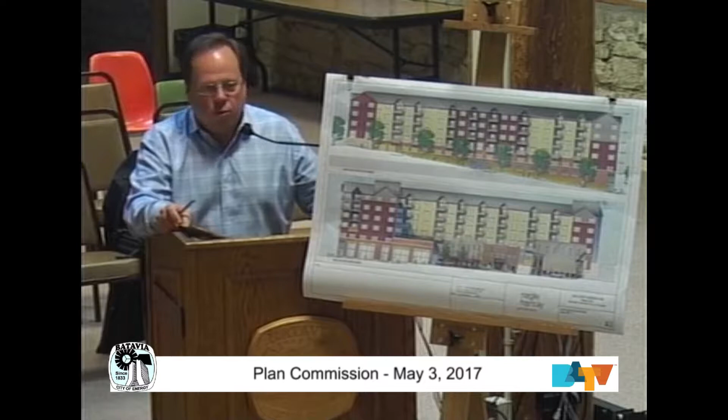Some of the items he'll be able to refer to on the boards in front of you, or the plan on the wall, or the sample panels. We're trying to cover all the items we changed, but some of it will be almost rapid fire, just a narrative of what we did on the plan. Again, if you have a question, please interrupt us. So with that, I'll turn it over to Don McKay to walk through those changes.

Good evening, for the record my name is Don McKay. I'm a principal at Nagle Hartray Architecture, located in Chicago. I live in Oak Park, Illinois. The drawings Dave referred to are a packet of about 15 to 20 drawings submitted responding to requests we had from the Plan Commission for additional information.

So I'm going to go through the comments as Dave indicated, running through them in groups of drawings. I'll start with the floor plans, then talk about the architectural site plan, the exterior elevations, and finally the landscape plan.

Beginning with the floor plans, the retail storefronts have been added and are now indicated on the floor plans. Excuse me, can they be put on the screen? Sure, so while you're talking about it, hopefully we can follow along.

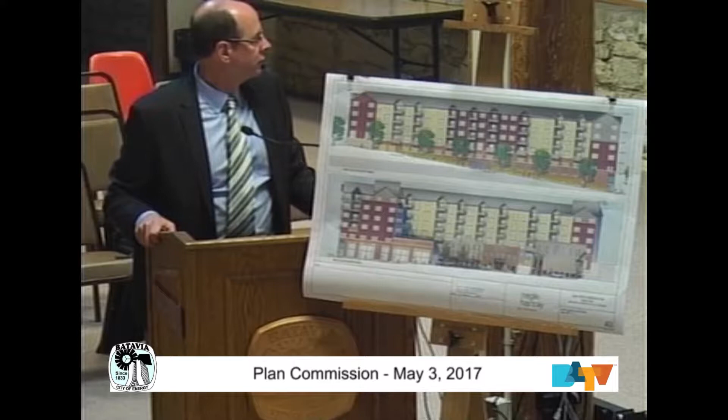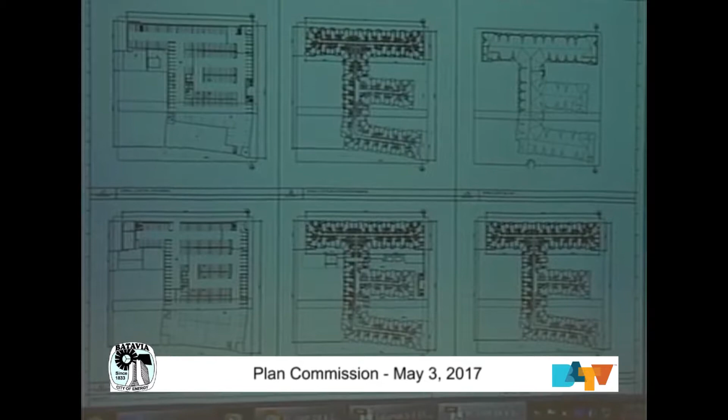The plans on the screen right now are at a very small scale, so it's probably going to be hard to follow what I'm talking about. The plans that follow are at a larger scale showing a lot more detail, and it would take quite some time to go through and pick up everything. So I'm happy to do that, but maybe the better thing is to go through the list of things we have, and if there are certain things you have questions or concerns about, we can focus on those.

We were asked to add the retail storefronts on the floor plans, which we've done, primarily along the Wilson Street elevation and the River Street elevation. On the lower garage plan, we updated the northwest corner to correspond to the angled corner shown above it. On the upper garage floor plan, exterior doors at the northeast and southeast exit stairs have been added to correspond to the elevations. The exterior door at the southeast exit stair was removed from the lower garage floor plan to coordinate with the grades on the site. This door has been moved elsewhere on the upper garage floor plan, as I indicated. The exterior windows and clear openings have been added to the garage floor plans to coordinate with the elevations.

All the openings shown at the garage on the elevations are now also shown on the garage floor plans. The two-bedroom units at residential entries have been updated to indicate projecting bedrooms above covered doors on the first floor. The one and two-bedroom units at the south side of the north-south bar have been relocated to coordinate balcony placement with the bend in the building face. Some of these were issues where the floor plan showed one thing and the elevation showed another, so we've cleaned that up to make sure they correspond now. A roof plan, which had been missing from previous submittals, has been included in the submittal you have right now. That's a quick summary of the floor plans.

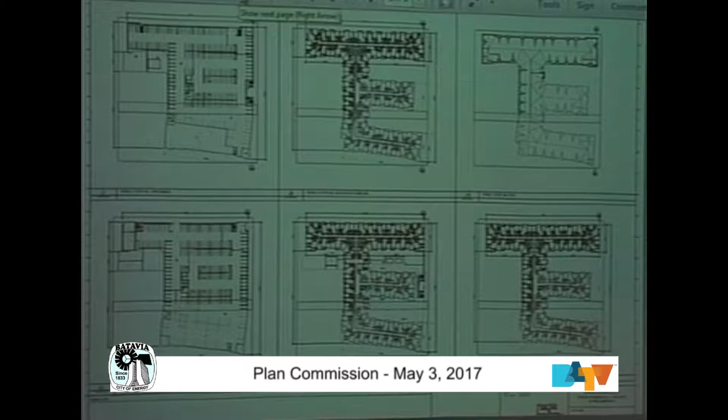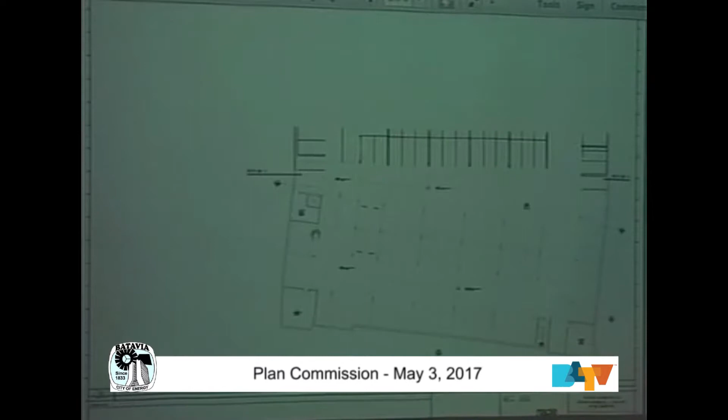I hadn't noticed the stair you were talking about, the door that exited - southwest side, is that on Wilson? Southeast, northeast, on the upper garage floor plan. Those are both shown. I thought you said one was eliminated because it didn't work with grade. Yes, there was a door at the southeast exit stair on the lower garage plan that was removed. So it's coming out the upper floor - that's correct, it was just shown on the wrong floor plan. And that ties into the tower, so that's the exit for residents also? It is, yes, it's an exit stair that goes all the way up through the building.

Any other questions on the floor plans?

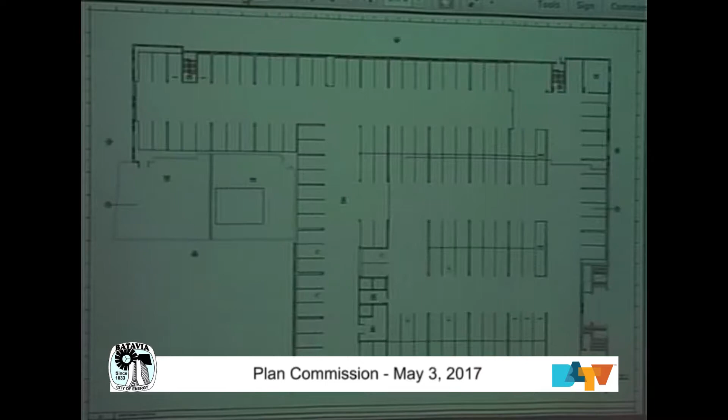Great, thank you. On the architectural site plan - distinguishing that from the landscape plan - on the architectural site plan, which is the first drawing, G001. Additional landscape information is shown on the landscape plans, I'll get to those in a minute. But on the architectural site plan, the building footprint has been updated so it corresponds now to all of the unit plans shown on the floor plans above.

We have a couple of hinge pieces in the building. It's very subtle, you can kind of see it on the plans there. So there are a couple places in the plan where the building jogs a little bit, shown two places right here. That's a clarification to the plans that wasn't reflected before - it's a subtlety that was a function of working out the interior unit plans and the coordination between the balconies and the unit plans on that side of the building.

The difference is the two streets, Wilson and River, are not parallel. That's correct, yeah. There's barely anything in this building that's parallel with anything else.

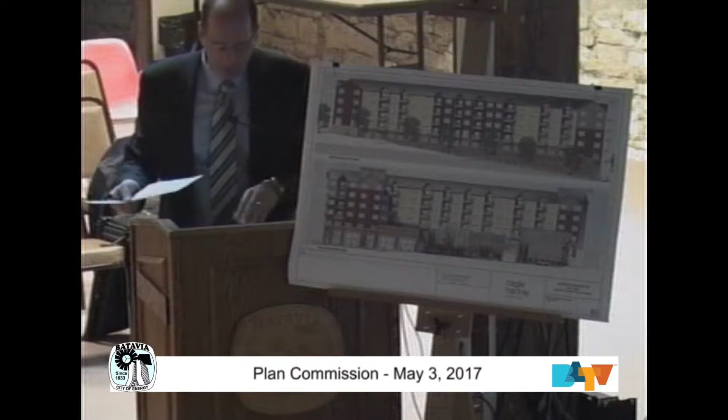And they're well back from the property line? They are, yes, I see it's recessed there - I apologize, I forgot my magnifying glass. It's hard to read these dimensions, they're small. To the southwest corner from the property line looks like maybe 6 feet. My eyes aren't that good either. 6'3", I'd say. I can read the dimension next to it, which is 12'7". It looks like it's roughly half that dimension.

On this site plan, we've also indicated with arrows where the entry points are into the retail space. Here's one bit of coordination that wasn't picked up - these two first arrows here, we don't actually have doors into the retail space there. Our first door into the retail space along Wilson is located right here, and then we have four others along this facade - that's a stair door there. We have two more retail doors located mid-block as well. That should correspond to the elevation drawings we have.

The reason we don't have retail doors further west along this facade is because of the way grade slopes off relative to the floor plane inside the building. It would require steps, which would make for inaccessible entries into those spaces. Although it's possible to put one in as long as you have an accessible entry - could be a secondary access, if needed.

We've looked at some other ways of raising a portion of the sidewalk outside here in order to get entries that align with the floor elevation and are accessible. Imagine this is the high point of the site over here. If you were to get on a walk that was level down to here, but when you got down to here, there was a drop-off in grade next to the public sidewalk. The trick is, if it's high enough, we've got to put a guardrail on it.

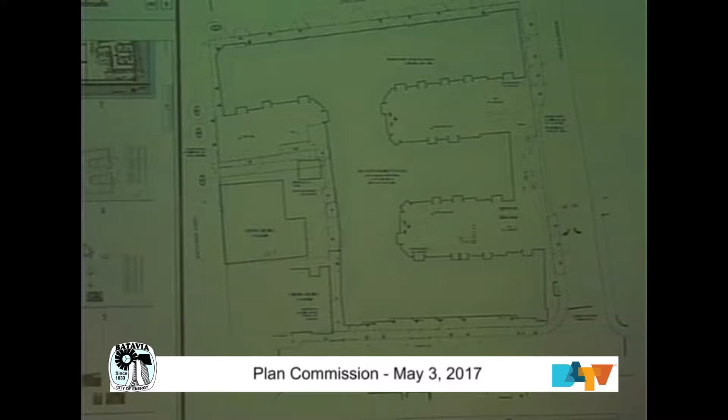And there's no landscaping proposed along there? The landscaping is shown on the landscape drawing. There's some, yeah, well there is on the east end. Yeah, there's trees and existing trees right now. Yeah.

So this drawing actually gives you a pretty good idea of where the property line is, probably a little bit clearer, easier to understand. Here's our property line. Oh okay. So what we were talking about earlier, here's a planting bed between the building and the property line here. This is really the public sidewalk area out here.

So what we were talking about earlier is that if we wanted to extend this sidewalk at a level elevation down towards the west end of the building, we could get a little wall there that allows you to get a flat walk up here and get more doors into the retail up here. Our concern is that that little wall with a guardrail on top of it especially starts to act as kind of a barrier between the public area and the retail space there.

Again, you could do that and have a stair on the west end of that. That's exactly what we looked at. Able-bodied people could use the stair, but if you had someone who needed accessibility, they could use the ramp. That's right, that's right. So as far as meeting the accessibility requirements, it can easily be done. I think this is more a judgment about what's best for the life of the retail space there, what's going to make it most desirable.

So Don, if I may, the elevations for the southern face, based on the revisions to the drawing, the door that's over the one that says boutique and cafe, those actually wouldn't be doors based on that right now, at least. Let me check the elevation. Is there a drawing you can refer to there? A2, the elevation drawings. Okay, so you're looking at the rendering.

Yes, so you're talking about this elevation here. So this door and this door will not be there, at least for now.

One of the things we're in the process of coordinating with our civil engineer is this slope along here. What's shown on this elevation right now kind of maximizes our ability to get the doors to the retail to align with our sidewalk. Unfortunately, this doesn't work very well with the existing curb elevation that's out there. The street elevation, you can see how it slopes up, gets flatter, you get a flat area, then it slopes up again. In fact, the street elevation is more or less a constant slope from one corner to the other.

If we do something like this, we're going to get more than a 2% cross slope between the curb and the face of the building, which is not going to work for accessibility. So that's why we're working this out with the civil engineer. We want to leave the existing curb where it is, we don't want to mess with that. And we also want to make sure we have a positive slope from the building towards the gutter, but it can't be more than 2%, otherwise it doesn't work for accessibility requirements.

So by the time we factor all that in, that's why we end up losing these two doors shown here right now. The only way we could keep them would be to drop the retail floor down quite a bit more than what's shown here. One of the results of that, we're balancing this against the bedrock elevations we have underneath, and trying to push the building further down into the bedrock becomes a challenge as well. So that accounts for the elimination of these two doors.

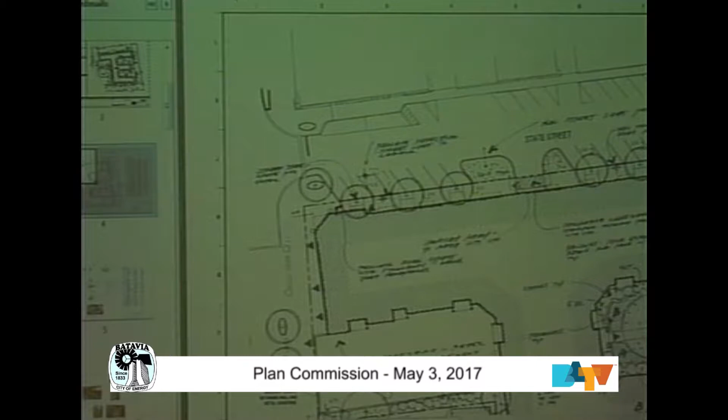So there are two landscape architects working on this. One is a landscape architect retained by the city to work on the piece between Wilson Street out here and the garage door back here that gets you into the accessible entry. The other landscape architect is responsible for everything else you see on the plan. So part of what we've done since the last submittal is coordinate between those two and make sure we've got a plan that reflects both designs.

The courtyard landscaping has been updated to incorporate the first floor residential patio. This was a question you can see in the plans right now. These little boxes shown here indicate where the first floor patios are in those courtyards. That's something that was not shown before.

Pedestrian lights have been updated at the plaza entry on Washington Street. There are a couple of lights shown out here, so there's one here, and the intention is that these lights cast light on the sidewalk, but also on the stair, focusing on the entry piece coming into the building here.

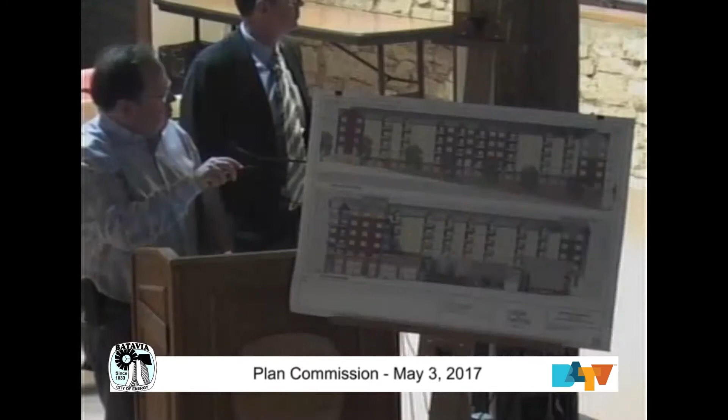Will that be an option for the residents? They're showing it if you zoom into that area. You can see the tables, and in the lower left corner there's a note about grills. Yes, fireplace with grills.

This is on River Street, by the pool deck. But again, as Don and Tom indicated, this is a private space for the residents only, but it is outdoor space.

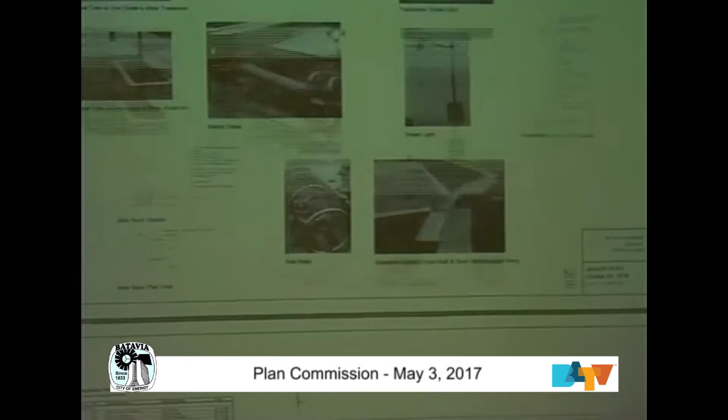Any other questions regarding the landscape plan? There was one other thing from the guidelines: if there were to be children expected to reside, tot lots and playgrounds should be provided. We didn't think about children, right? There are no tot lots.

Isn't that part of the zoning ordinance? What Commissioner Peterson is reading from are guidelines, not codified, not part of the zoning code. There are multiple family residential districts in the zoning code with specific open space requirements, but the downtown mixed use is not one of those districts, so there are no minimums required. I realize they're guidelines, I just know they were brought up at the committee of the whole, that we need to pay more attention to those.

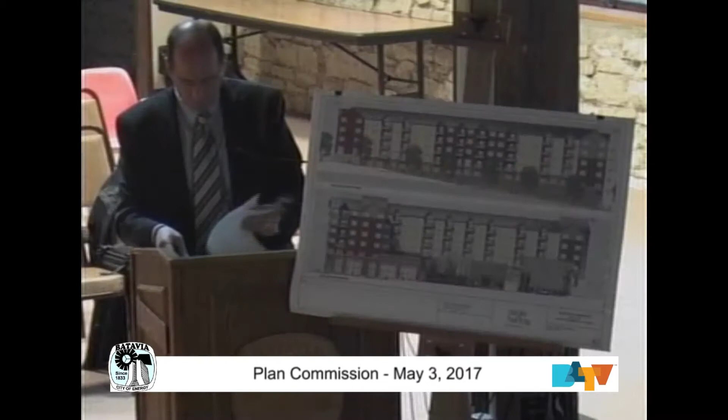You mentioned two landscape architects, and the city is working with Chris Lannert, yes. He's got some kind of meandering walk shown there, I'm trying to understand what that even is. I can address that since we hired the consultant.

Essentially, we have what's the existing call it alleyway, not legally an alley, but we'll call it that for description purposes. It goes behind, to the west of where the dentist office used to be and east of the yoga studio building, along the western edge of this building. Right now it's a driveway. We're proposing to remove the driveway and replace it with a pedestrian sidewalk and landscape area. Our landscape architect is designing a pathway that provides access to the garage from Wilson Street, but also provides access to the dumpster enclosure used by some property owners along River Street as a unified garbage access point.

So that's part of the design, a sidewalk essentially meandering on purpose, but then would also have some additional landscape areas. That has not been finalized yet, still a work in progress. From that perspective, it's really not part of the review tonight. Some of it depends on negotiations with the adjacent property owners, so that's something we're still working on. So yes, you could say that is excluded from this.

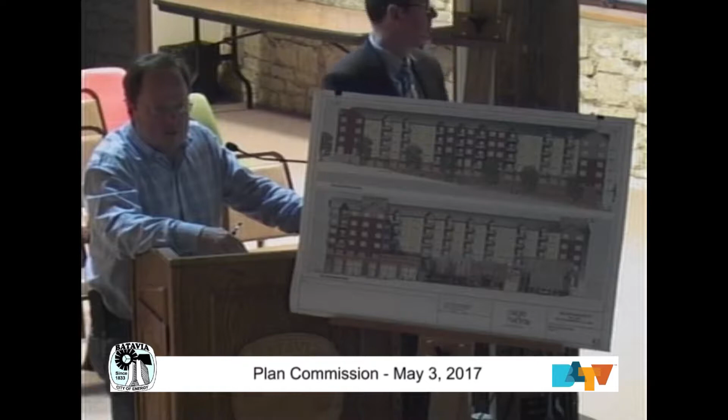I believe that circuitous path you're seeing is really a brick pattern on a larger brick patterned area. So don't interpret it as any type of fescue grass or plantings in between that path. Or too narrow a path. Exactly, I was a little concerned about that. And one of the challenges we have there is it's a relatively shady spot, so we have to carefully think about what kind of plantings we put in, since there isn't a lot of sun in there.

Going past that point, our plan shows it almost all green, which suggests it's all planted, intended to be grass. Is there no hardscape beyond that point, further back into the alleyway between the buildings? The only area where there may be some hardscape, and this hasn't been confirmed, is potentially a sidewalk from the garage entry and dumpster area to access O'Brien's backyard beer garden. But that hasn't been solidified with the O'Briens and their plans for the backyard space.

But it's something you're amenable to. Yes, yes. Well, until that's decided, it will remain as green space, green planted materials.

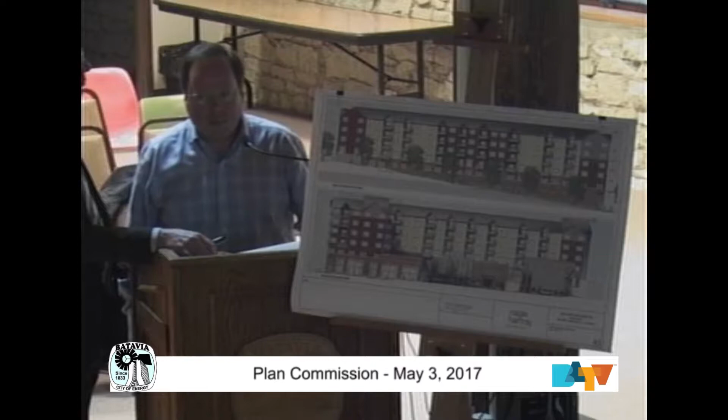And then further north, between their property and the south face of the pool deck area, you show green space there, but I know there's a pretty significant grade change along there. Is that pretty much at the same elevation as their current retaining wall? The retaining wall will be higher than grade, but if you think of their steps, somewhat steps, landing, steps, landing, steps, think of that as a uniform slope rather than steps on what would be the north side of their retaining wall.

Their retaining wall will remain. Everything north of that retaining wall will be planted. It's not intended to be a publicly accessible space. Right, but it's not like significantly a different elevation, like a pit between the walls. I envision the retaining wall will almost be the height of a handrail, so it'll stick above grade on both left and right sides as you go up that stairway. Does that make sense? Yeah.

Okay, and then in the courtyards you have some trellis work shown there? Portico. Yes. Can you guys describe in a little more detail what's going on there? It's intended to be a wood trellised structure—we're just checking if there was a detail provided—but it's not a roofed structure, it would be open, perhaps a shade area.

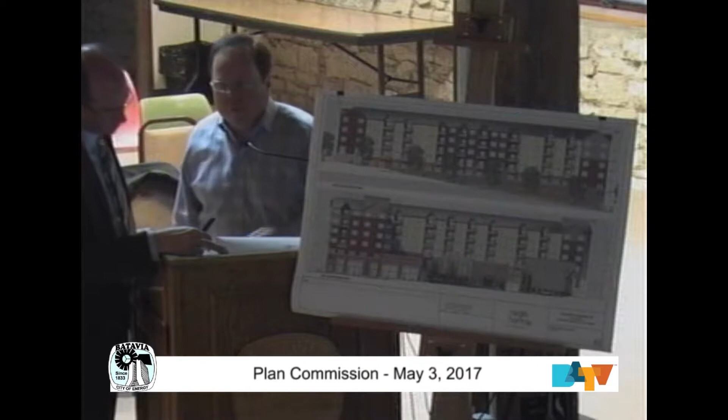I'm not the plant expert. Any other commissioners want to comment on the plant selection?

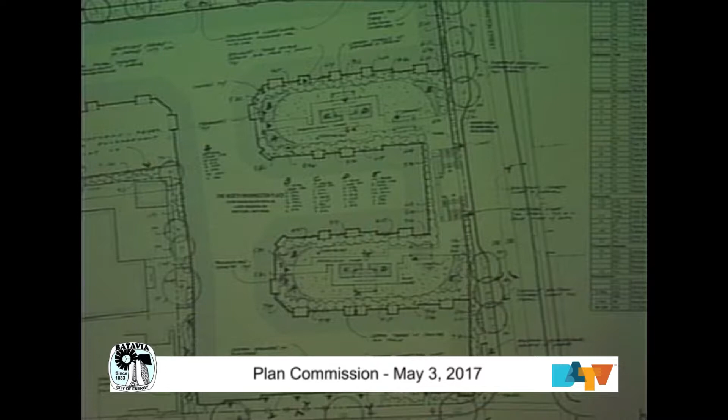The only problem I had was what I mentioned in that walkway. But if the city's landscapers are going to look into that, that will be our responsibility. That may extend further north, as Mr. Patzelt said, providing additional access, so some of that may be altered as we continue with negotiations. Will we get to see that plan? We can provide that to you, sure.

There are plantings shown along the Washington Avenue streetscape up against the wall, which is nice because it's going to soften that a little bit, especially where it meets the courtyard and you have that kind of 7-foot stone wall, won't be quite as harsh.

There was mention that this drop-off lane was extended at some point based on the fire department review. Is that still something that's going to happen, or is this now reflecting it? It was the easement, I think, that is currently under review by IDOT. IDOT has it in their hands. They have not responded back to that, the size of it, or whether it's even possible yet.

But if it happened, it would lengthen this, so we'd lose a little more potential streetscape planting. Possibly, and we have no control over that, because it's kind of governed by the length of the drop zone plus what the fire department wants for a fire lane also. So it's kind of a combined drop-off lane essentially, but ultimately IDOT controls that, so we're at the mercy of IDOT as to what they're gonna allow or not allow.

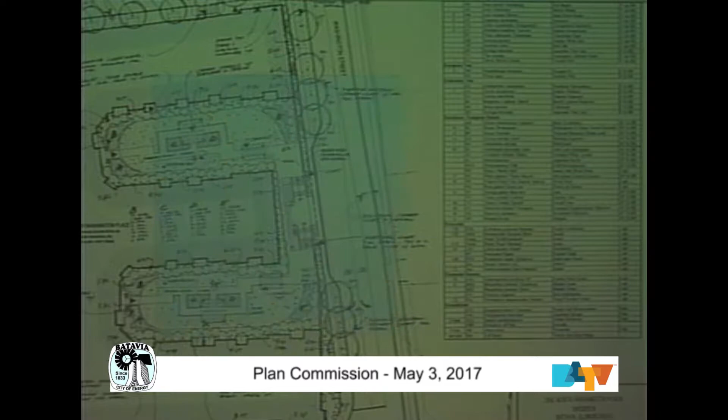And then you have 2 staircases and a ramp. I assume the ramp is required for ADA purposes? That's correct. It seems kind of a long ramp. Yeah, it's a long ways, and quite frankly you could go in the garage and take an elevator, but I guess maybe they can't access the lobby that way. The idea is to make the building universally accessible, so they can go in the front door just like everybody else can.

And then you do have another walk at the upper level that would connect the 2 courtyards. That's right, they can get around.

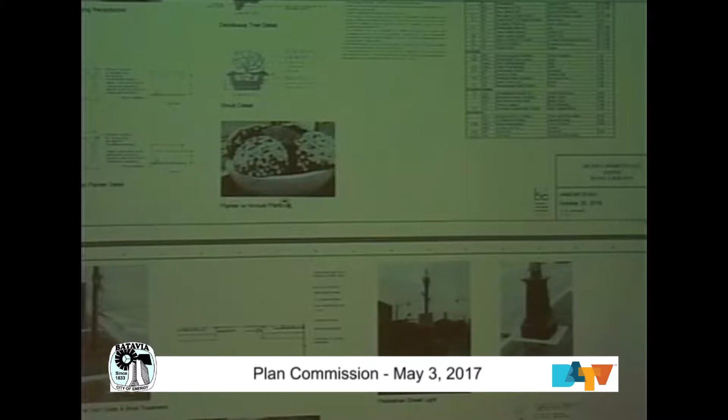And then all of the streetscape furnishings, do they parallel what we're using in the other areas of downtown? Yes. I know the lighting, we've got any number of different light fixtures downtown, but these are the historic fixtures that are in this area. And then the other furnishings match what we have there now? Yes, the specifications were taken from your streetscape plans for River Street, and photographs were taken of the actual furniture that's out there now.

I saw that you identified asphalt pavers at the garage, on the sidewalk at the garage door entrances. Is that what the city is using, asphalt pavers in sidewalks? The crossings, the pedestrian crossings are basically a type of stamped asphalt. It's not exactly that, it's basically we shave down the asphalt and put this epoxy down and stamp this epoxy, so it looks like brick. That would be the crosswalks at the streets. Is that the same thing you'd use at the driveway entrances? We're having a tough time reading the note.

Is it on the sheet or are we going... No, on that sheet just below it says decorative stamped asphalt. So I would presume they would probably use the same process we've used for our crossings then. Does that seem appropriate there for the staff? Decorative crosswalk, yeah, okay.

So that's really just to identify to pedestrians walking along the street what the intent was, similar to the stamped asphalt that you have perhaps down at State and River. When a motorist is coming to that crosswalk, it's somewhat enhanced or pronounced that there could be pedestrians crossing. Similar to here, this is a public garage, the driveway going in, trying again to enhance or highlight that pedestrian crossway, so someone walking along there knows something's going on, and somebody pulling in or out of the garage knows or is reminded that pedestrians could be coming left or right.

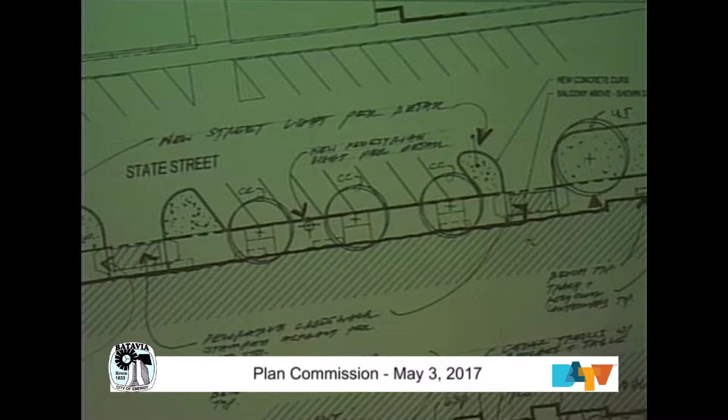Speaking about the driveways, are there going to be stop signs inside the building so people stop before they drive out into the sidewalk area? Yes, and on the second level, the driveway to the right has a garage door that has to go up, so any car has to pull up to it to actuate the garage door opener, coming to a stop before the door goes up and you proceed. Same thing exiting the building, you pull up to the door, actuate the opener, and the door goes up.

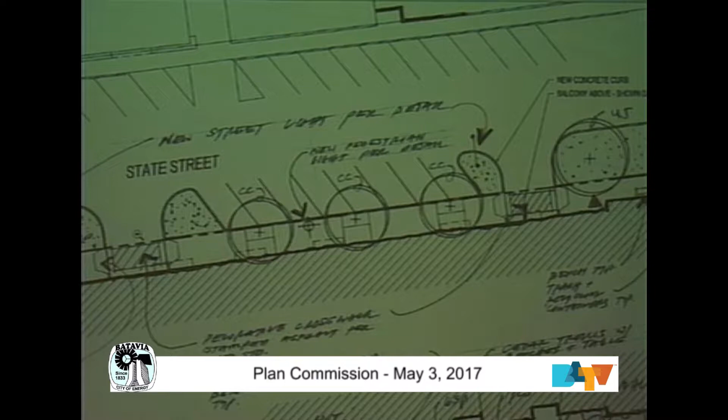On the lower door, the one on the left, there will not be an overhead door, so that will have a stop sign and/or yield sign. That's the city's preference. The city did not want garage doors there because of maintenance issues, but based on the developer's need to insulate the building properly at the ground floor level, we allowed it on the top level of the garage. We did not want them on either level frankly, but it was a concession to allow it on the top level, not the bottom level.

Some of your images for the furnishings show brick treatment, but I don't see on the plan specifically where that's identified, on the landscape plan. Is this expected at all light fixtures and all trees, tree grates, and benches? Yes, it is. Back at the lower left corner as an example, there's a note that refers to replacing the pedestrian lights per detail, so we'll see a similar pattern continue around this development, consistent with the balance of the downtown. That is correct.

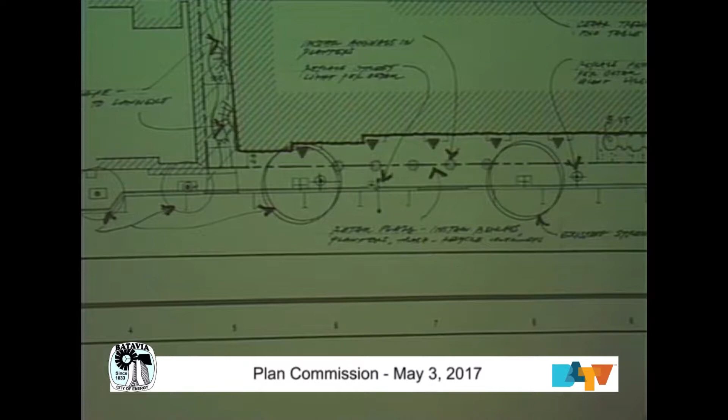Can I go back to the handicap ramp in the front, at the stairs? I was noticing how long it was, and it seems like it would be better to have an exit or entrance at both sides, because somebody with a wheelchair or a walker going up that area, that's a long way.

I think you're meeting that requirement. Let me point on this screen here. We need this amount of ramp to get from this elevation up to this elevation. The way the ramp works is you slope up here, hit a landing, slope up again, hit another landing, and then slope up to get to your final elevation. So if I understand what you're asking, could we get a landing spot on both this side and this side? Well, not a landing, but an exit. So you're saying it's two different levels, the one on the south side and the one on the north side? This landing here is at a different elevation than this area up here, and also different from this landing here. The rule for a ramp like this is that every 30 feet you have to put in a landing, you can't just have a continuous ramp, you need rest stops as you go up. That's why the landings take up the length that they do.

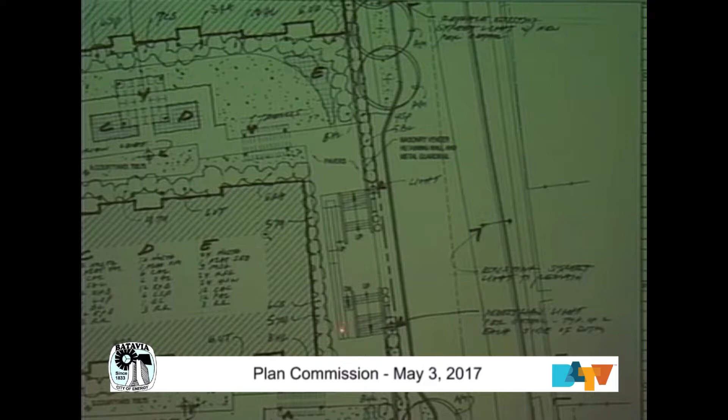But it's still the same length of ramp. We're not shortening the length of ramp you're actually on. Really, the length of the ramp is governed by the change in elevation.

Yeah, I understand, because there are very specific requirements for how much you can slope the ramp. You can only go up 1 inch for every foot you go horizontally, or 1 foot in 12. If you've got a 7-foot change, you're talking a lot of ramp. Yes, it is what it is.

All right, thank you. Any other questions on the landscape plan? Otherwise, we need to move on. No, we'll have to cover it tonight.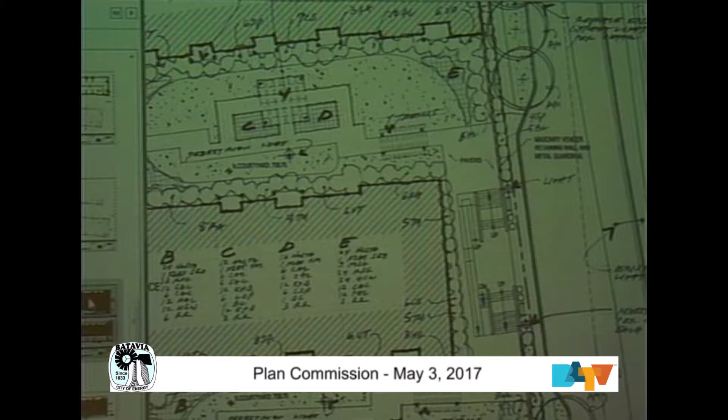Okay, the last item I have to go over are the exterior elevations, and most of what I'll reference are shown in the black and white drawings that were submitted. Some of it were picked up on the colored elevations as well. The first thing I want to point out is that there was a request that we show the exterior elevations in the courtyard that were not shown before, so we have shown those now.

They're in black and white, not rendered in color, but I think you can see from looking at them the character is very similar to what we're doing around the rest of the outside of the building. So we've provided all of those elevations now. Hopefully this also helps to clarify some things that might have been confusing in the colored elevations we had before.

For example, back in this corner here, there's a wall that actually slopes at an angle. I think it might show better in one of the other elevations. This might be a good example of it here. So this wall here is at an angle.

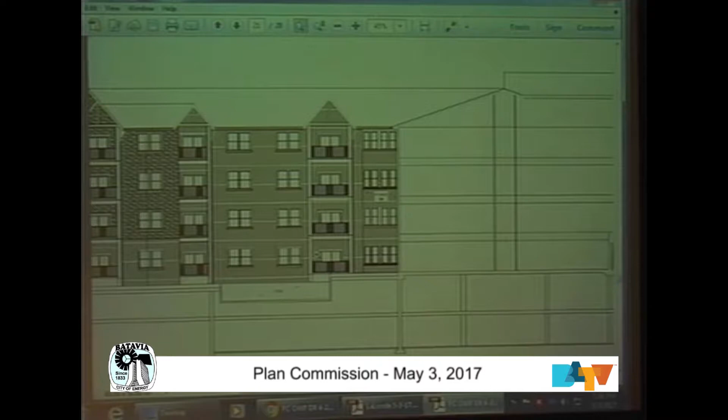When we showed the previous elevations, especially on the courtyard side, those walls were so far in the distance it was hard to read them. We rendered them in a kind of fuzzy way because they were so far away. They're rendered more realistically now, so you can see the windows, the siding - they're really treated the same as the other units. This is not being proposed as an open area or an all-glass curtain wall. What we're proposing is to treat it the same way as the other elevations.

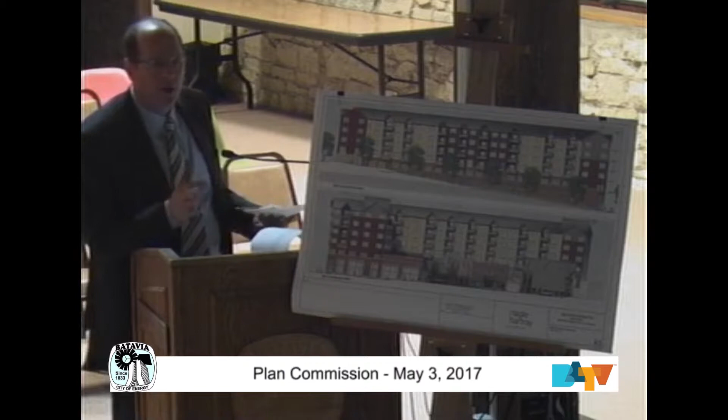So hopefully these drawings help to clarify that, because I think we talked about it at one of the previous meetings. I'm not sure it was very clear when we discussed it.

Every inside corner is at a 45-degree angle. Correct. Some of them have windows, some have balconies. That's correct, but material-wise they're treated just the same as all the other straight-on elevations. That's right, yes.

I do like seeing these because I like the way you turned the corner. It looks like you've taken the shingle pattern down pretty far onto the facade on that elevation. Is that correct? Yes. And is that color scheme representative of what we see on the Washington Avenue elevation? Yes, I'd have to go back to Washington Street, but I think this is the wine red color on the siding here.

This is the gray shingle color here. And so I imagine this is one of the things that would help, especially in the courtyards, to use the lighter colors more. Right, the darker colors - it'll help make the space feel more open and a little brighter when you're inside. So if we thought about taking that red color around to this point, and the gray shingles here, maybe the gray shingles come over into this point, and from that point over it's that yellow siding that wraps around the back of the rest of the courtyard.

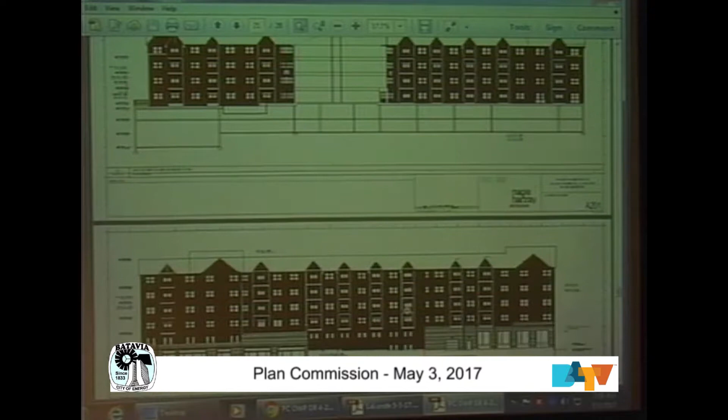So one of the other things we've done is we've added the gutters and downspouts around here. You'd have to zoom in, but you could probably pick almost any part of the elevation and see it. We're going to have a lot of downspouts. For example, here's a downspout, here's a downspout. Every one of these pieces of gutter has to have a downspout associated with it. Here you can see the downspout with the bend that gets it back to the inside corner, the way it's shown here. So we've now shown the gutters and downspouts on all of the elevations.

Are they the same color represented here for the gutter and the downspout? Yes. I know the lights are out, but it looks like white or an off-white. It's white, yes. I mean, I guess we can talk about the color scheme a little more. I have a little bit of concern with the number of downspouts, that it'll be very distinct on the elevation, because that's the only white on that elevation, at least as you're proposing it.

Yes, I think that's something to think about. I think one of the ways we're trying to mitigate the appearance of the downspouts is putting them in the inside corner. One of the benefits we get from the projecting balconies is that it creates an inside corner in which we can locate the downspouts. I'm not saying they go away entirely, but they're not nearly as dominant. They probably look more clear on this elevation than they might in reality, simply because they're rendered in black and white, and you can see them very clearly there.

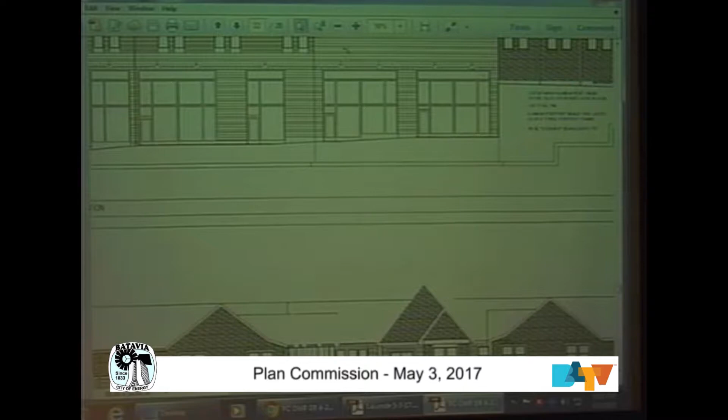And then typically at the exit doors, it's more of a functional fixture, as opposed to a decorative one, just to provide safety lighting at the exit doors.

So at the signboards, it looked like more of a period style - I don't want to say like a gooseneck type. Gooseneck style, exactly. And then I assume they're painted - is there a finish to them?

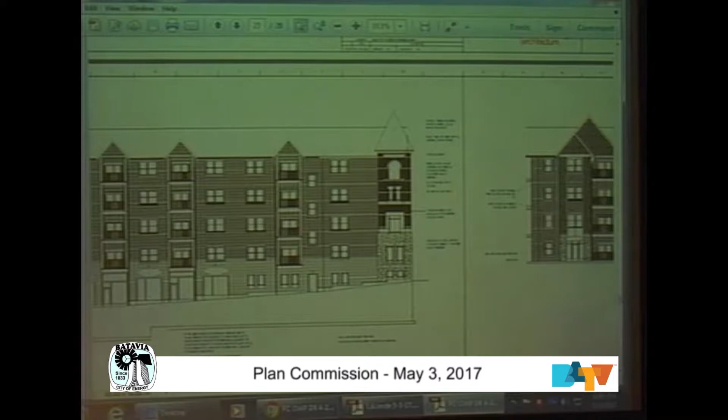I think they show on the Wilson Street elevation. They're a lighter color on that elevation - what we're showing there is that kind of yellowish color, if you will, against the brick background that we have there.

While you have that up - that's a good representation of what I had mentioned in my email related to the stepping of the foundation. I know it's something that has to happen on a project with this kind of slope at grade. If everybody can see, at the bottom the dark line represents the street or the sidewalk - there's kind of a blank space there and it steps up, because you can't run the masonry down below grade. It's bad design to do that.

So the foundation gets exposed, and I was just concerned that we don't want large sections of foundation exposed. I would say a foot to 18 inches max, which means more steps in the foundation.

This might be a little easier to control as we're working through the civil engineering grading I talked about earlier. I think one of the things that will happen as a result is we won't get such a steep slope as you see here, which results in bigger steps along the way. We like to keep at the minimum point 6 to 8 inches - that's just good practice.

What Tom is referring to is that if that step is too big, you get rid of it by putting in another horizontal piece and then stepping it again in the center. I think that's something we can take a look at. The rule of thumb of 18 inches, plus or minus, for a step - we want to make sure it lines up with a brick course, so 16 inches might work well because it works with brick coursing. And I'd just add that we want to make sure the finish is high-quality.

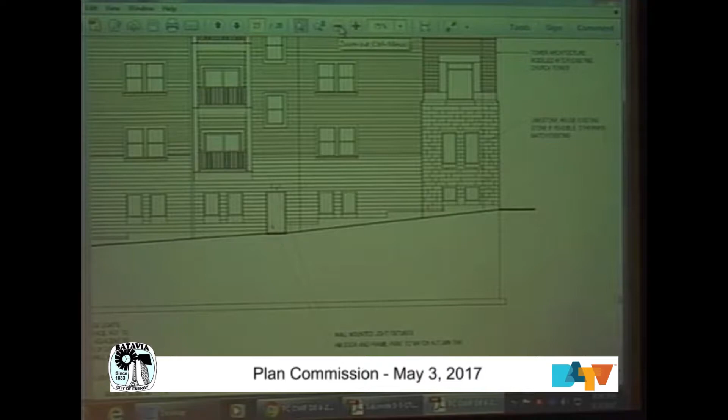Okay, and then really, I think the last item I have to mention regarding the elevations is just generally coordination between the elevations, what's shown on the floor plans, what's shown on the landscape plan. So aside from the couple of retail entries that I pointed out along Wilson Street, everything else should be pretty fully coordinated at this point. And that's all I had on the exterior elevations.

Were there any changes made to these elevations that we're seeing tonight that reflect some of the items that we requested? Obviously, we can see that the balconies and the small gables are the same as what we had seen before. We asked about additional offsets, maybe creating some larger focal elements in the center of this.

It's a very long elevation. It's got both a lot of kind of rhythmic verticality and horizontality to it. I've looked at a lot of the other work that Shodeen, and I know you have assisted him with. Geneva, Dodson Place is a good example, where you're working with the interplay of the mass of the facade to break up the scale of the building largely. And this is much larger than what we see in Geneva, probably closer to Greenfield. But even that project isn't this tall.

So my concern has been from the beginning that this is very large, that if we're not going to be able to address the height and the mass, can we do things visually that address the scale of the building, bring it down, bring some lower roof forms, project some elements out in the facade, possibly changing some of the materials up. Greenfield had a nice use of panelized system as opposed to the horizontal hardy board, which some forms projected out. We have that in a PowerPoint if we want to look at it.

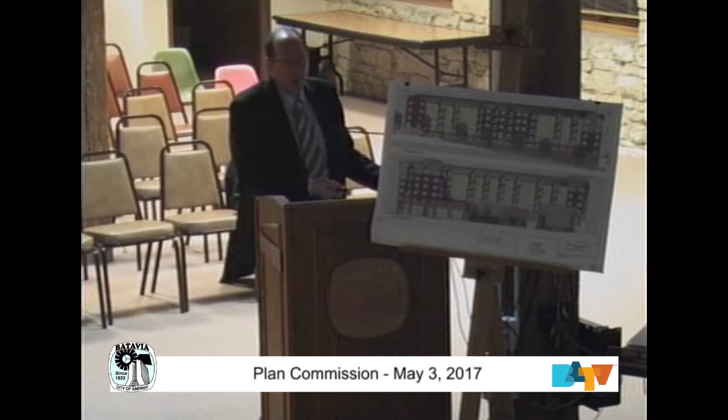The idea of bringing the roof line down - one of the ways you do that is, so if I understand correctly, Tom, this is the gutter line that we have right now, the eave line. So one of the ways that you try to reduce the appearance of the height of the building is you bring that eave line down to, say, here instead, and then this becomes a dormer that pops up, or it becomes a piece that's recessed, which has a fairly dramatic effect on the unit plans and reduces the size of the unit plans.

I think if we got involved in that, as we have in other projects, the projects where we've done it where it's allowed for that kind of accommodation more easily are where we have much larger unit plans to start with.

Because when you get the recess in the roof, you're not reducing the effective floor area of the unit plan as much when you have that to work with. So I think it leads to, with the unit plans like we have in this building, a different set of unit plans and less rentable area, if you will. So I think we're sensitive to the concern you're raising, and we've tried to address it in a different way.

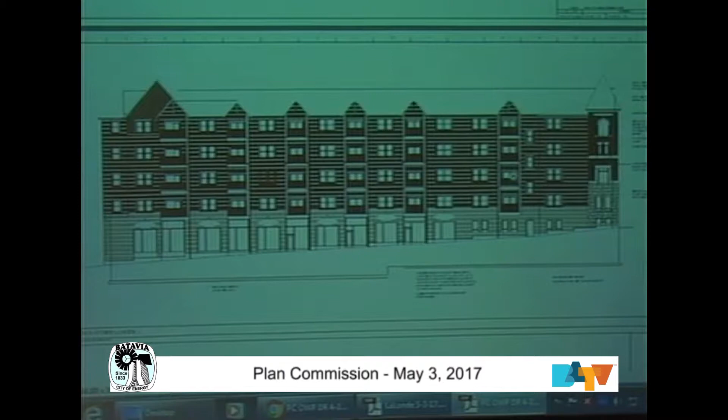Okay, I guess we can agree to disagree. I understand what you're saying. I'm not a proponent of a building with 60 gables on it, or whatever number we have here - I think it's just a little over the top. A better interchange of the massing on the facade would actually improve overall aesthetics and visually reduce the scale.

As an example, Tom, there's been some discussion - and I think you were going to refer to it - about the building that is similar in color scheme and similar in size, the Greenfields building right off of Geneva. That's the building right there, Drew. Yep, and if you can get to a street, maybe get out onto Keslinger Road and get a view of it.

I did take some photos of that, it's in my PowerPoint. Oh, it is? Okay, Tom's photos - if you want to just go to my PowerPoint, it's probably easier. Okay, we can get the side elevations.

One of the big differences between the Greenfields building and ours is that their balconies are flush - they don't project in and out. And also, the gable roofs they use the gables in between the balconies versus on the balcony. So as Don was describing the view against the sky, you'll get almost a sawtooth keyway effect as you're walking along the building looking up at the sky. At Greenfields, you wouldn't get that perspective - the gutter line would still be a flat line.

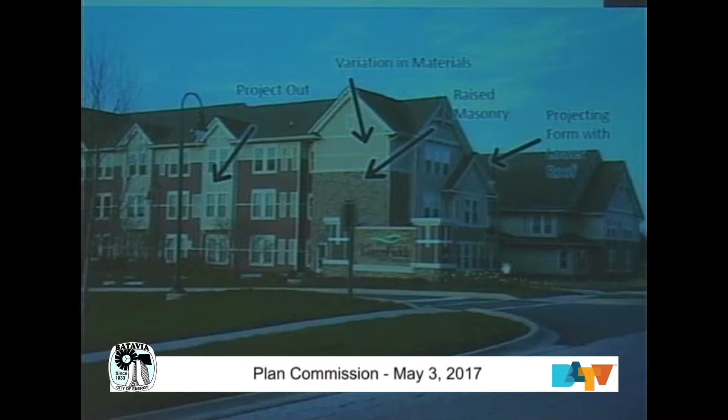Tom, I think what you were referring to in some of those gables - did they go to a flat panel versus a shake? And that flat panel, I don't know if it had batten strips? Yes, it did. Wasn't it metal roofs? Can you zoom into that gable, Drew, by chance? So is that the section you're referring to, the flat panel? Correct. Oh good, I'm glad you got it. Do you have an opinion about the flat panels?

I guess, thinking about the texture you get with the siding we're proposing, whether it's lap siding or the shingle-type siding, I think that's going to have a character that's more pedestrian-friendly, a friendlier feel than would a bunch of flat panels on the wall. I think one of the other differences here - not to say these things can't be blended together somehow - is that this is not in a kind of urban-type setting.

I think one of the things we're trying to respect is the street wall as an important element, to get the retail along it. It's much more of an urban condition. I hope that reinforces what you're trying to do downtown, where traditionally the faces of retail buildings sit right up on the street, forming that edge in an urban environment. So we're dealing with a slightly different condition here.

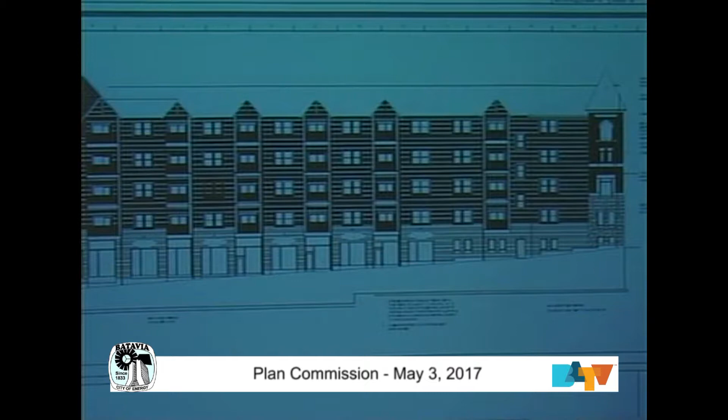Okay, you want to go back to the elevations? Any other questions or comments related to the elevations? Can you go to the Washington Street—do you have those in color? The main elevations are all in color, correct? Yes, it's on the board up here as well. Washington, I said street, I meant avenue—it originally was platted as street, I read that in an article, so it's changed at some point.

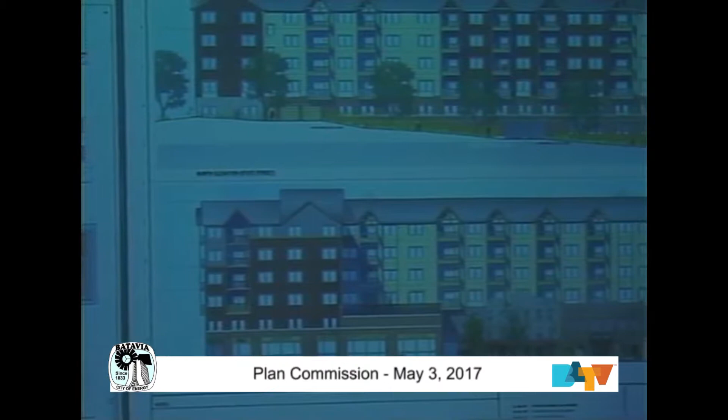So from the beginning, we were very receptive to the Washington Avenue elevation. There are some distinct characteristics that make it appealing. You've got significant offsets with the courtyards, so the massing works well. At least from this elevation, you don't have that kind of repetitive, typical gable. You've actually taken the entries and done something nicely proportioned with two gables, one nested in the other. And you've brought down what looks like a different color shake or shingle, a darker color as opposed to the gray.

I mentioned earlier that one of the problems with elevation drawings is that we rarely see a building that way. This particular elevation is one of those exceptions, because you'll actually be able to stand on Washington Street and look back and see this. So making a bigger deal out of the entry with the double gable, we recognize this is one of those rare instances where you'll see it kind of dead on. Part of it was giving a hierarchy to the building by calling out the entries, especially at the back of these courtyards.

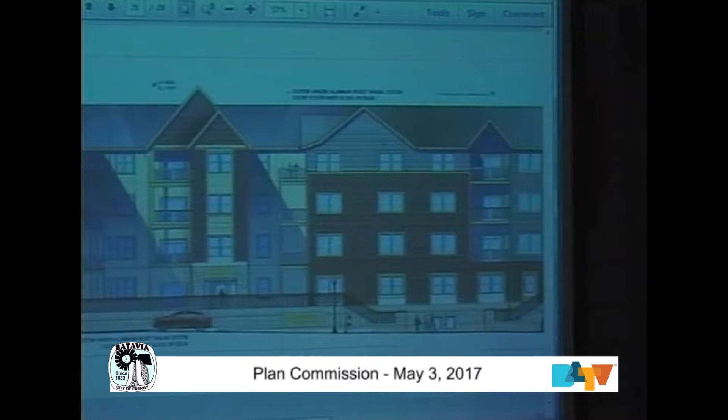So that happens on that condition pretty much all the way around the building? Well, you don't have the residential that goes all the way around the building. If you flip around to the State Street elevation, that might be the other one to take a look at. You do have it on the State Street elevation as well, right? Yeah, you have it up at what is effectively the third level of the building, because that's where the residential starts. Correct. You also have it at the windows into the garage. Yes.

And in that elevation, it's brick as opposed to stone. What is the transition between masonry and the wood or the HardieBoard?

The siding here, it's a little hard to see, but there's a piece of trim, projected trim, that would be HardieBoard, this would be painted trim, that actually projects from the siding, and it wraps in a band over the top of this window. It kind of frames this window, but it comes over the top, and when it hits this part here, above the brick, it runs horizontally above the brick. So it's like a water table that sheds water, it overlaps the brick.

Yes, you want to make sure you shed the water off. And that's flat, correct? But the rusticated stone is the sample that you brought? Yeah, the stone piece is on the bottom here, and the other's cut stone, right?

Which is pretty typical and has a traditional flavor to it. I think it's actually a detail that's on the existing tower on the church. There's a detail like that. Yeah, ties in nicely with that.

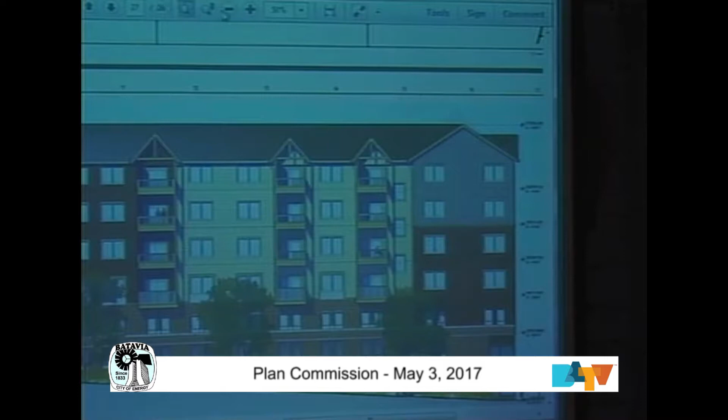Well, I mean, I had suggested some drastic change in the massing of the building at one time, stepping it down, et cetera. Obviously, that's not going to happen. But again, from my perspective, this is a long building that has a lot of repetition to it, and I haven't seen that in other architecture that you've done in the area. So I'm just suggesting that there are ways of impacting the elevations visually by a change in material, and masonry is effectively a way to do that. No, I understand what you're saying.

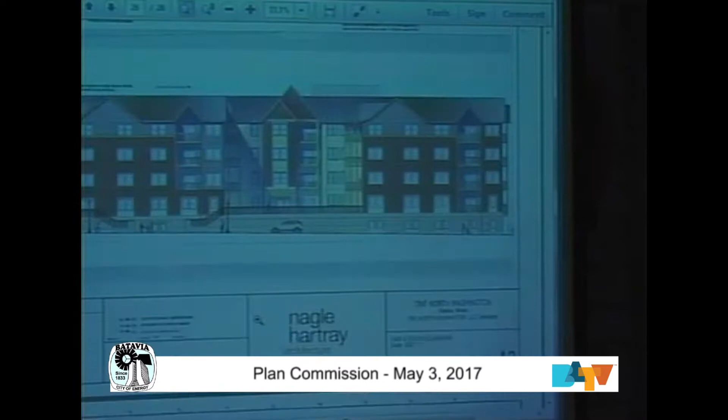So I think there are really two elevations where this question is relevant. I think it's the Wilson Street elevation and the State Street elevation. Because on the Washington Street elevation, it's really irrelevant. On the River Street elevation, there's very little building that's on the River Street elevation. So I think it's really these two elevations that we're talking about.

And so I don't know if it's a cost issue, would it make sense to take some of the brick off of the State Street side and put it on the Wilson Street side, for example? Or, I'm trying to think of other ways to do this. I think we've used the brick at a constant height across here. I mean, one other way to think about it is that you pop it up in certain areas and drop it down in other areas and get some variation. But I think the balconies interrupt that datum line sufficiently that I'm not sure we're really going to get much bang out of that.

I don't know, let me ask my client if he has an opinion on this. We believe that the masonry we added, where we added the height, that's to the bell tower, and it's really to have the bell tower be the focal point on this elevation.

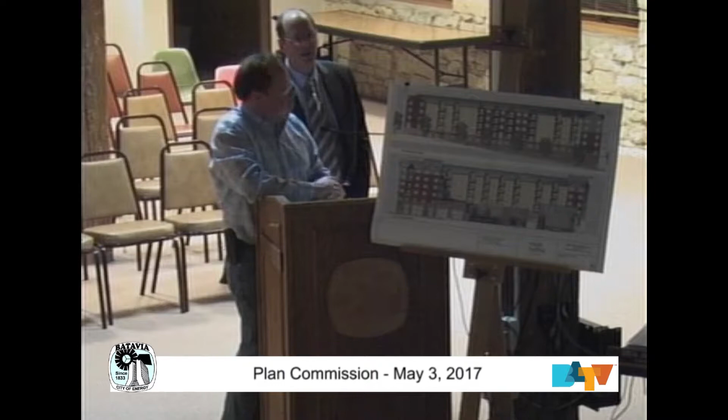Quite the contrary, on the State Street elevation, we still feel there's too much masonry on that elevation, especially as you get towards the west end or the right end of the building. I don't disagree, you're getting 3 stories of masonry. It's a big wall, and you've got a lot of horizontality going there.

I was actually thinking along the lines of what Don said, maybe borrowing some there and strategically looking at another location. Possibly the Washington Street corner element, at Washington Avenue and State Street, could have some masonry go up a little higher on the building. Just a thought. But I was actually thinking of forms in the middle, different than just a color change in the siding, that interrupted the regularity of the patterning of the balconies and windows.

So if we hold on this elevation for a second, if I understand what you're suggesting, Tom, forget the fact that this is a State Street elevation for a minute. But if we took the brick shown here, left this datum line, brought the siding down to here, and then took this brick and basically filled it in here, so that the brick jumped up, came across, maybe came back down and across. Is that the kind of thing you're thinking of?

Yes, I'd just be interested if you looked at that to see if there was any merit to doing that. Okay.

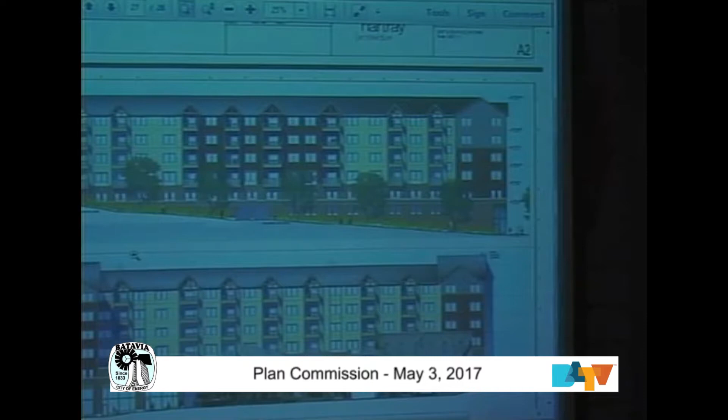Speaking of the Wilson Street elevation, I'm sorry, I have a question on that. Drew, could you put that back up again? I overlooked it when you asked—basically the central part where it goes back, that area shows a lot of verticality. Those windows, can you describe what's going on there?

Yes, that's what I was trying to point out in the black and white elevations we were looking at earlier. Because it was so far in the background, we didn't try to render it exactly, since it's on an angle, it's kind of tough. But if you look at the black and white elevations, you'll actually see that it's the same language of siding and windows that's carried across that back there.

So those windows aren't truly that? No, it's not like a curtain wall that's there—or something, right. And how about the roofline there? What's going on with the roof?

So what you're reading here is, this wall is not perpendicular to the wall we're looking at in elevation here—it's actually at a slope. So one of the things you're reading is the projection of balconies as that recedes into the background, back to that corner there.

Okay. Sorry, I stand corrected. Yep.

This roofline above, what is that? Those are the roofs that are over the balconies. Okay, so what you're looking at here are actually the porch pieces, and they project—now, maybe if you go to a floor plan, that'd probably help.

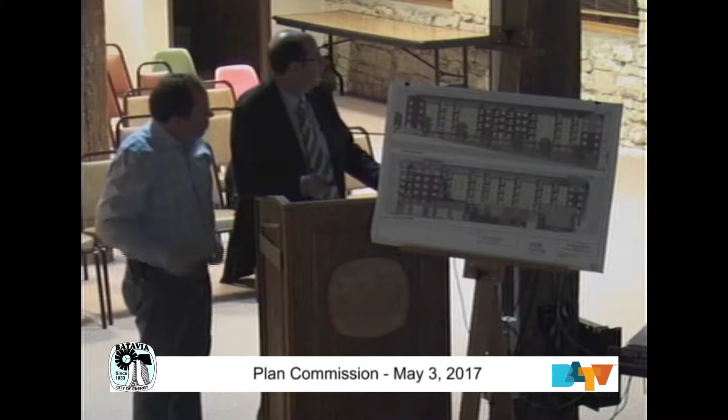So we're looking at that elevation as if we're looking at it dead on here, the first one, at bird's eye. As if you're standing here and looking at it at 90 degrees dead on.

When you get down to this corner and you're looking down along here, see the way this wall flares out a little bit? Imagine there are a series of balconies out here that are projecting into that plane of view. Each one, as you get farther back, the next one steps out a little bit further, then the next one a little bit further.

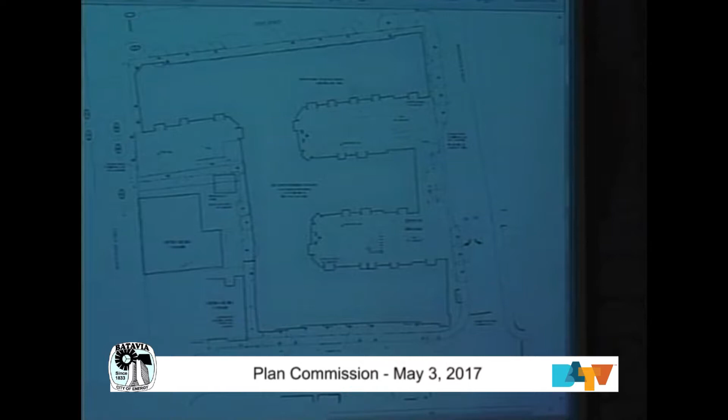So when you look at a plan, they all kind of blur together, and you see the floor plan. Maybe the roof plan would help. The other ones are here, but the roof plan may be just...

A106.B, here we go. Or, I'm sorry, if you go down to the one below that, 106. It's gonna be, you're not gonna get the full effect of it here, but this will help. So that Wilson Street elevation that we were looking at, this is the Wilson Street elevation right here.

So that elevation is taken as if you're looking at it dead on, facing this facade here, perpendicular to that elevation. So when you come around the corner, every time you come around a corner that's 90 degrees, you're seeing this roof element, for example, the side elevation of it. Same thing, you're seeing this roof piece here as if you're looking at it dead on, same as this here.

The problem is when you get back to here where the building bends like this, see the way this roof line- imagine if you extended the corner of that roof line down to the elevation drawing, you get this series of kind of setbacks. So it is hard to read, but it's kind of a true projection of the geometry of the building to that facade.

And the wall that we see at the bottom, is that just masonry in color, the reddish color, and then the cream above it, that's flat masonry? You're back on the elevation? Yeah, I'm sorry, I'm on the elevation. On Wilson Street? Are you on Wilson Street?

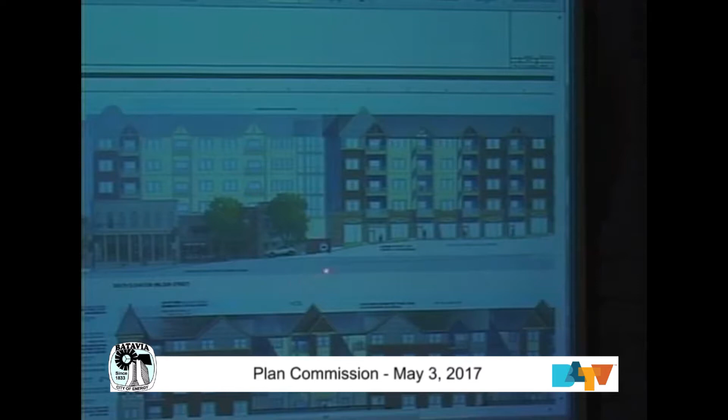As is the red at the bottom, what is that? I'm saying red, it's really not red, I think you call it cinnamon. I think what it's trying to show is that the alley actually slopes up as you go back, so you're actually looking at the road as it kind of recedes and rises as it goes back into the alley piece there.

So what's at the end of that alley? What are we looking at? The sidewall of the pool deck. It's a blank wall. There's nothing at the end. Is it masonry? Or brick? It's siding, I mean, masonry is brick, I'm sorry, siding.

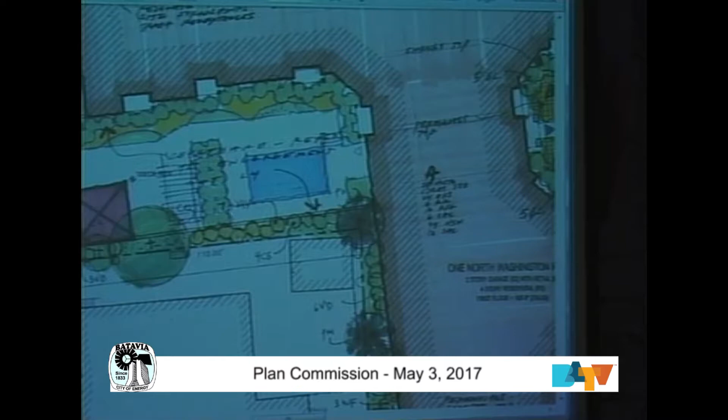The last sheet in the handout, A204, shows that sidewall, and it is masonry. Shows it as- okay, I'm mistaken then. So it's the same brick that it has on the River Street facade, which makes sense. You go around the corner, it's all brick.

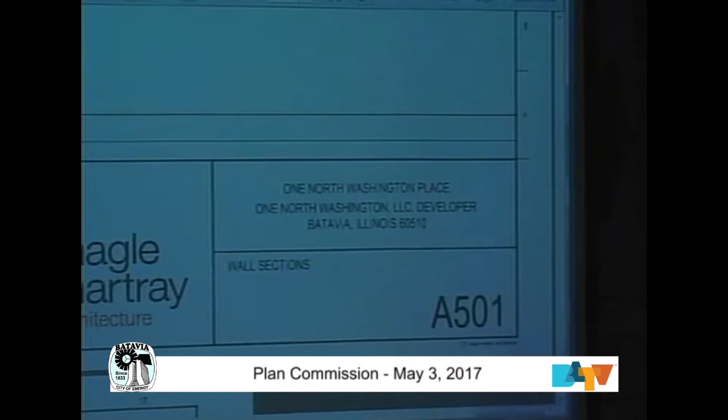Step that comes back to the inside corner. So all the way down the alley, you're gonna see brick. That's fine with me, and it's hard to represent in an elevation that's got a sloping grade, but that's fine. Brick is good, brick is good.

We also see the full elevation of the west facade of the building on A202.

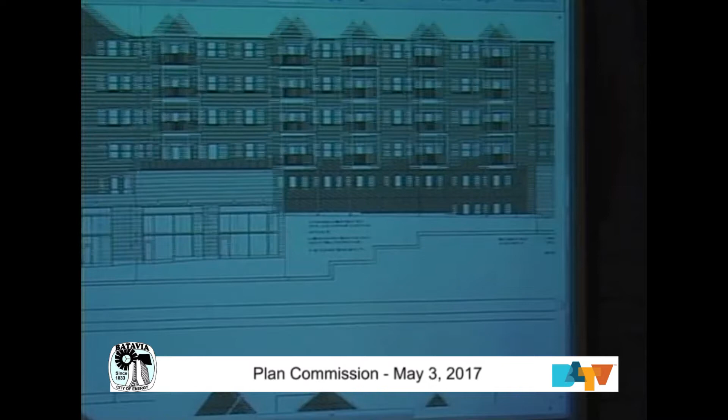You have masonry come all the way along the alleyway to correspond with the walkway that gets you back into the garage. Then you stop, and it turns into shingle siding. Why wouldn't it just be masonry all the way across? Is that a cost consideration? Yeah, it's kind of a service area of the building, it's not occupiable.

There are actually retail spaces that front on the alley. That's just turning the corner, right? There's windows there, but no access into it off of the alley. That's kind of nice though. The intent is that when you're walking down that alley, it's not a cold enclosed space - you can see in and people can see you. Not a canyon.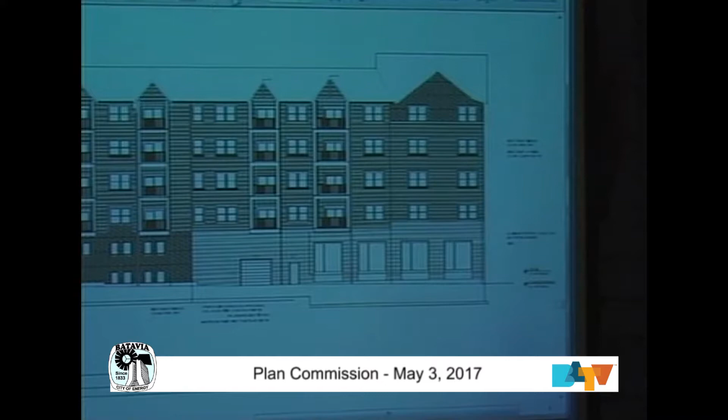I had a question on the balconies. You provided a section which helps us see that - probably on the last page. In looking at other facilities, like the one in Geneva, I noticed the underside of the balconies is covered. I realize these are wood frame, and I don't think it'd be appealing to look up from either Wilson or State and see a lot of exposed, raw treated lumber on the underside of the balconies.

What are we using? We're going to paint those. The underside treated wood will be painted, and then you'll get a two-tone with a Trex decking type material - a different color of the joist versus the actual decking.

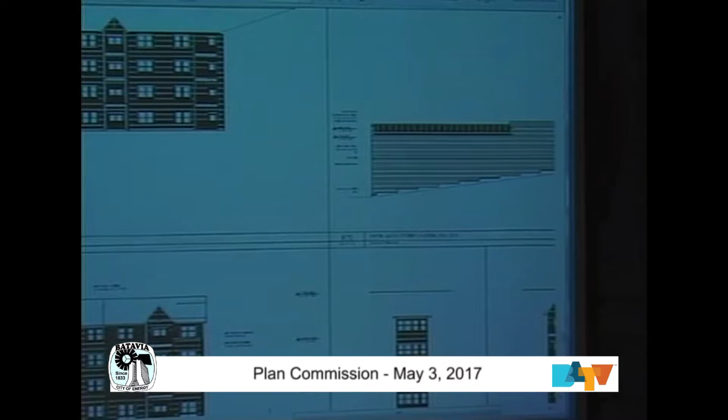I understand from a practical perspective that you don't want to cover that, because the elements get in through the decking - it's not weather tight. But I did notice in Geneva that you did cover them, and I thought that's kind of a nice look. It looked like you covered it with maybe an open slat wood or something. I don't know if you remember that - you might look at it.

Which project are you referring to, Tom? The one near the train station, is that Dodson? Dodson, yeah. But that's because there's retail on the first floor, my recollection, so you have to cover those decks.

Which we have here on Wilson Street too, yeah. But the decks are projecting out beyond the retail, where they're not like that at Dodson. Yeah, I don't recall the detail at Dodson you're referring to. I have an image of it - once we get to my PowerPoint, we can look at it.

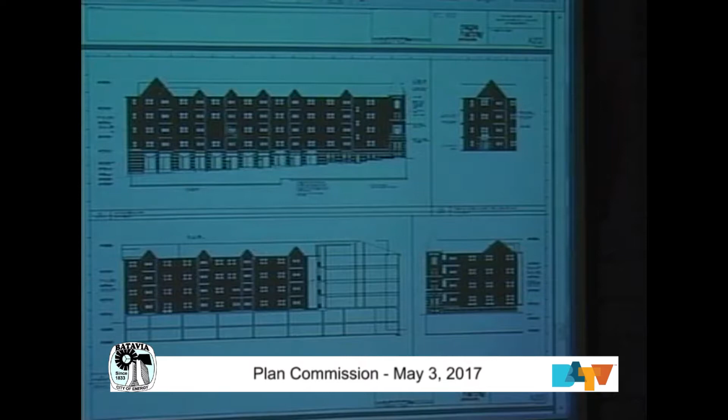Tom, just for clarification, are you saying the ceilings of the balconies, each one above another - is that the material you're using? Yeah, there's no ceiling to a balcony, it's exposed underside wood that you would see in a residential deck. But in this case they're all elevated above you, so as you look up the facade of that building, you're gonna see the underside of all the exposed lumber.

Dave's saying you're painting those. We paint it, yes. Could they be lumber and stained? I had an idea referring to our arch on River Street - that stained wood with the stainless steel lettering that says River Street on it. I wondered if you carried that stained wood somewhere with this, perhaps underneath or under the overhang of each balcony, if wood as a material is softer. Well, it's a treated material, which has that green tone to it.

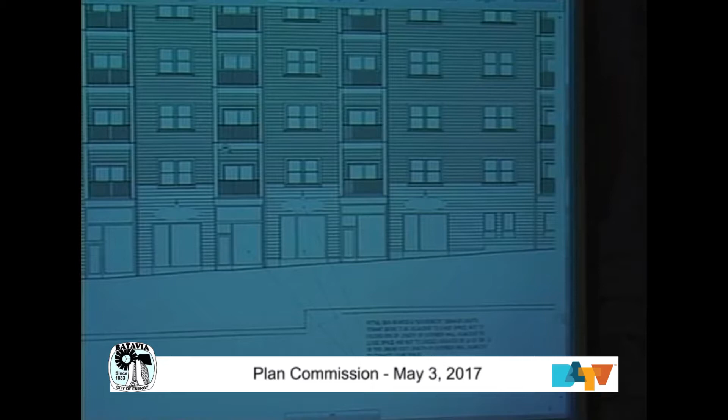Oh, if it's stained, does that not work? You get that green, typically you get the green that bleeds through the stain, and you get a murky looking stained color. You have to do a solid stain or a paint on that treated material.

I have seen that done underneath a gable as it projects though. Sure, but the gable is different than underneath the deck. So are you underneath the roof structure versus underneath the porch deck? They don't use the same treatment, okay.

So it would be painted underneath the roof deck, and I believe the gable has a finish, doesn't it? The underside of the gable is finished - painted. It'll be another material in the Hardie board family of materials, more of a flush siding. They actually make one that looks like kind of beaded car siding.

That might be appropriate to use there. Okay, okay. I just thought any kind of wood, any kind of stained wood, would soften the effect.

So I think if you paint the structural members underneath the balconies the same color as the rest of the balcony framing, it'll look like a unit. It'll look like it's all integrated together.

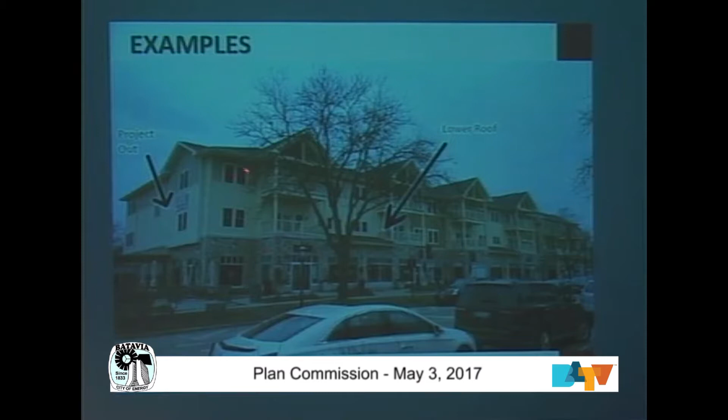When I talk about moving forms in and out, I'm not saying you have to do anything drastic with what's going on inside. This projects out and you get maybe another foot or 2 of space in the units behind there, but it does a great job of playing with the overall scale and massing of the facade. This building is 3 stories tall; we're anywhere from 4 to 6 stories tall. So think about 3, and on the River Street side, 3 more - pretty significant.

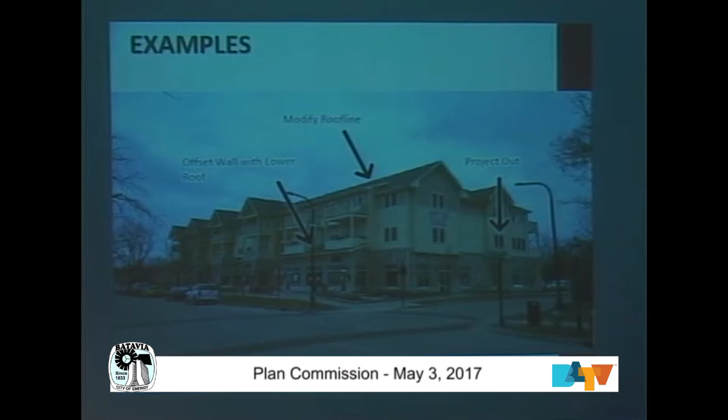I'll go through these fairly quickly. Similar examples - I liked what you guys did here. Rather than just continue to repeat the gables all the way along, you did a little different adaptation of the slope of the roof. You can see how it flips up as opposed to the main roof form adjacent to it. This roof form comes down right over the top of the window, so you're playing with the plane of the roof visually without impacting what's happening in the units behind it.

I've continued to be a proponent of corner balconies. I think you did it very successfully here. What it does is relieve the mass at the corner, which is critical in my mind, especially on the River and State Street corner because of the height of the building. Again, examples represented on the balance of the building.

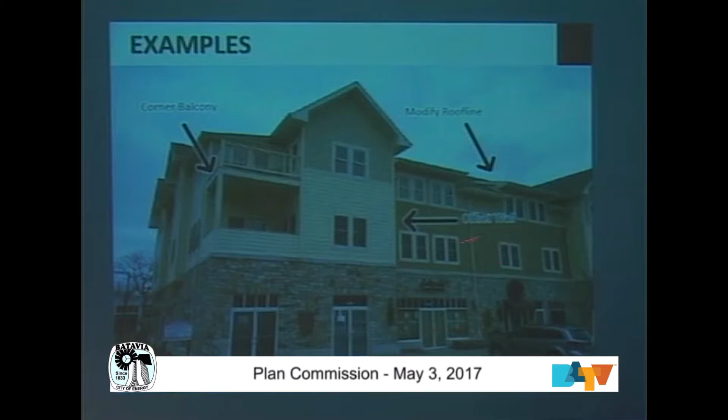Talked about the offset walls - great way to break up the mass.

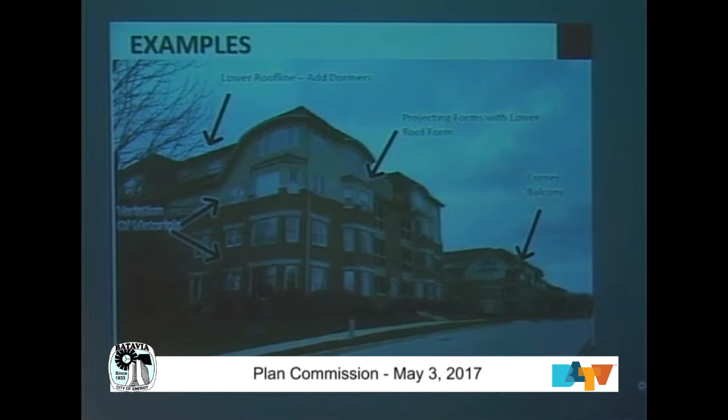Another similar example, again interplay of the roof forms. I'm not real excited about the repetition of the gables here, but these are projecting out. There's a little difference in the use of material on the face of this - we talked about that. Again, lower roof forms at the main level.

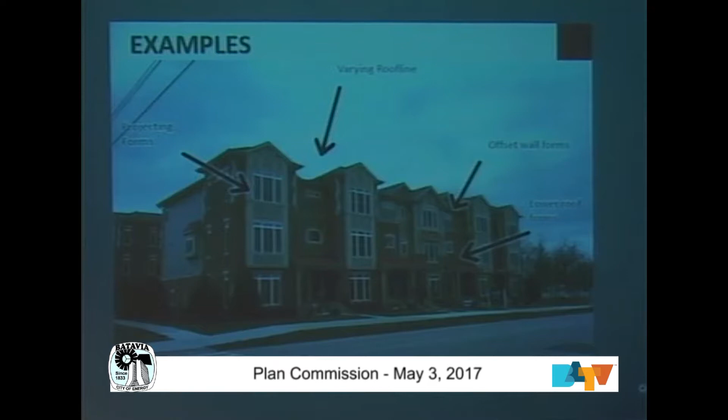I like this building - it does a lot of really interesting things. Not necessarily a proponent of the architecture for us, but it's a great way to turn a corner rather than just square it off. Maybe it's something to consider at River and Wilson. You did carve out the first floor space to at least open up that corner a little bit, which is what I was talking about earlier, where we currently have that open corner and a plaza with some artwork.

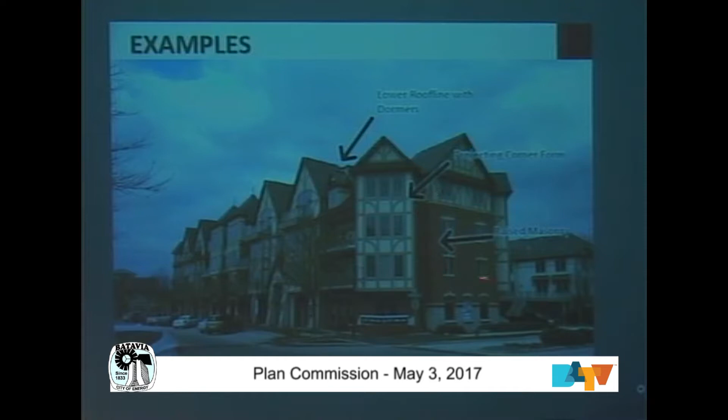But again, taking the roof forms down, bringing the masonry up - if you go to the next slide, done very successfully on this building. Lower roof form.

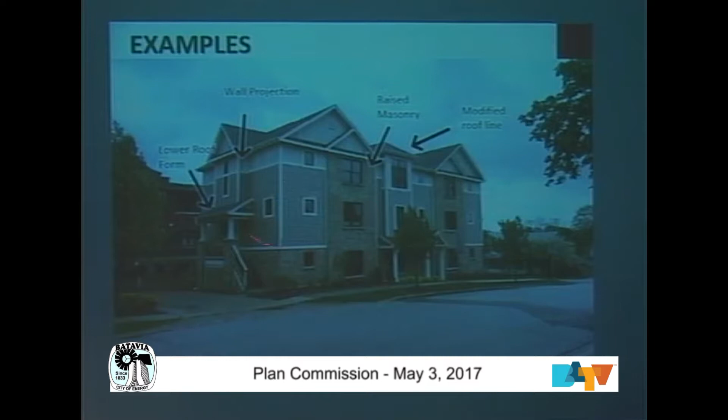Next slide. And this is in St. Charles, actually. These are under construction. Has a more residential scale. I'm not saying that this would be appropriate necessarily for this project, but it does some of the same things that I've been talking about. Next slide, please.

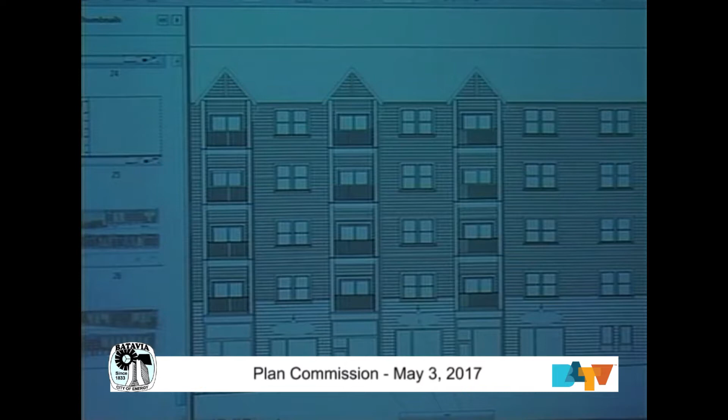So I don't know if there's any receptivity beyond what we've discussed tonight. I know that I heard the word 50-50 when City Council directed the project to come back to us, that there's compromise both ways as far as what we're looking to achieve for this project. And I would hope that you would be receptive to some of those ideas that you have used very successfully in other projects in neighboring communities.

I don't know if you have any response to that. If I could just interject, one of the other things that City Council did give as advice in this matter is not to discuss the changing of roof lines. So I think it might be an unfair question to ask the developer.

Okay, so why would the City Council tell us not to change roof lines? So if he wanted to come back and agree that we don't need so many gables, we can't change the number of gables on this building? I'm just reiterating what City Council gave as advice for this meeting, so.

Okay. It just seems strange to me because it's a significant component of the elevation of the building. We've already agreed that we can't change the mass, we can't change the number of units. We're not supposed to talk about parking. We're not supposed to talk about traffic.